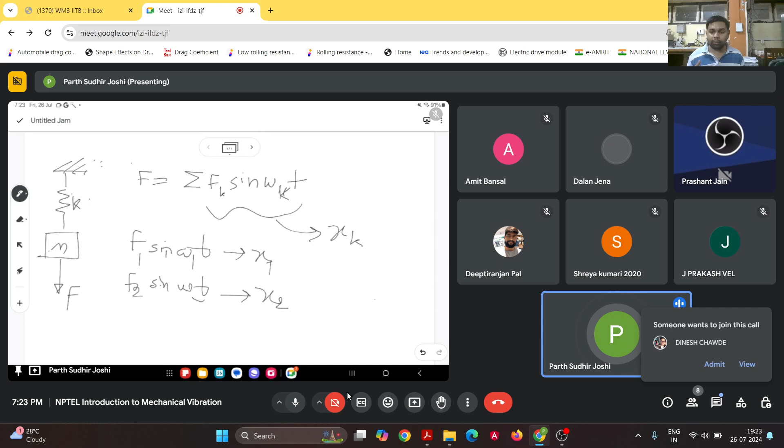Sorry about the bad writing, it's not easy to write on a Jamboard. So basically, I'm trying to express the force as a summation of sinusoidal or harmonic forces. Now we know the response of this system to this kind of harmonic force, let us call it xk. We know how to derive that. So if there is a response to f1 sine omega1 t, and f2 sine omega2 t, we call these x1 and x2. Then the total response would be the sum of these responses, x1, x2, and so on. That would greatly simplify our analysis, because we do not know directly how to derive the response to a certain general periodic force. So by decomposing the forces into harmonic ones, we can simplify our analysis that way. So does that answer your question?

Yes, sir. Okay. Does anyone have any other question? Does anyone else have any other question?

Sir, I have one more doubt in the same concept. There are two types of exciting force: one can be a periodic function type, and the other can be a harmonic type. So what exactly differs between the two? Are sine or cos functions always harmonic functions?

Right, so generally sine or cos are broadly classified as harmonic functions. But a periodic function is a more general kind of function. For example, a square wave or triangular wave are also periodic functions, but it's not easy to write one single closed form equation to represent them. So generally we can write a general periodic function as a sum of different sine or cos functions, and by that we can simplify our analysis. Does that answer your question, sir?

Okay, sir, yeah, okay.

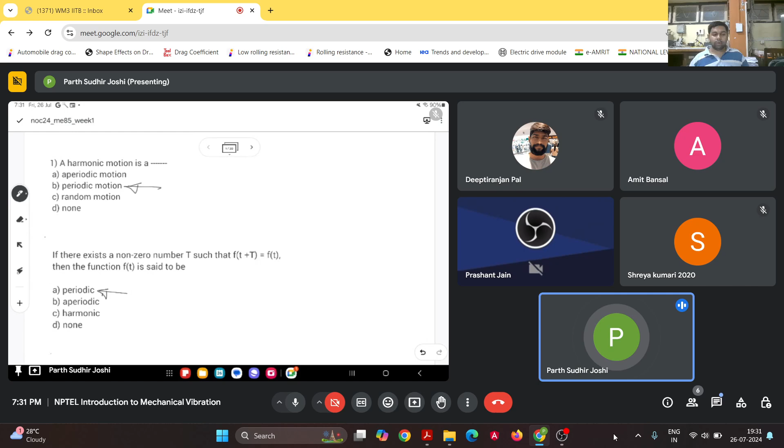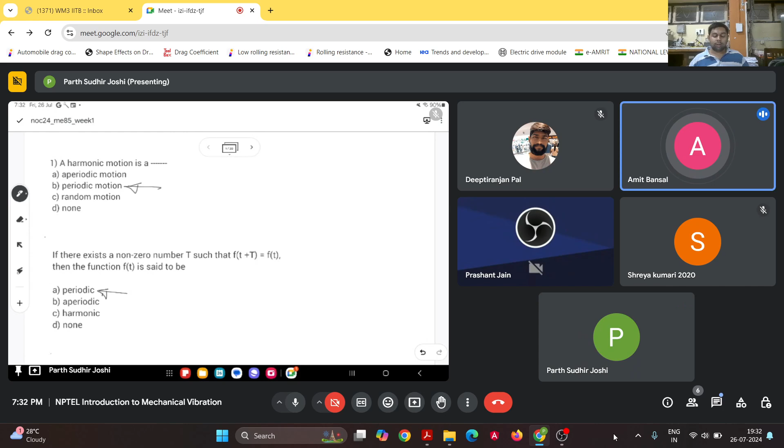So any idea what it is? Sir, periodic. Yes, it is periodic only. That is the general definition of any periodic function, that if there is a number T... so what is that number capital T called? If small t represents time, what is that called? Time period, yeah, time period. So T is basically the time period.

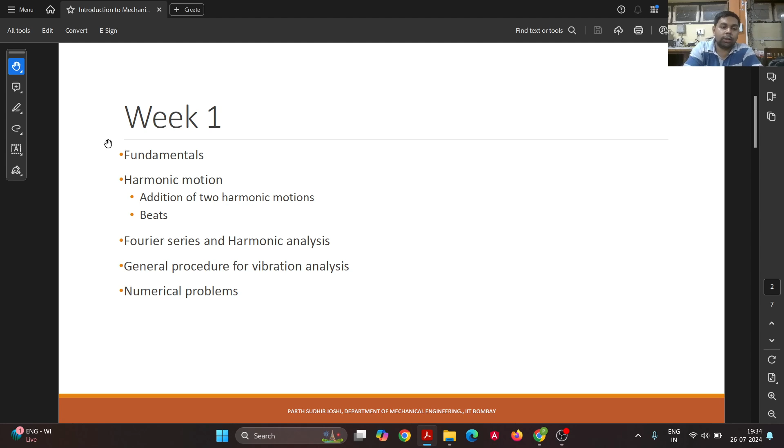I had put together a list of some videos just to motivate you and discuss how the study of vibrations is important. Many of you are already working in industry, so you are well aware why we need to care about vibrations. I put together a list of some videos so you can have a look at that.

Maybe I can just play one or two videos for you. Just let me know whether you are able to hear the audio.

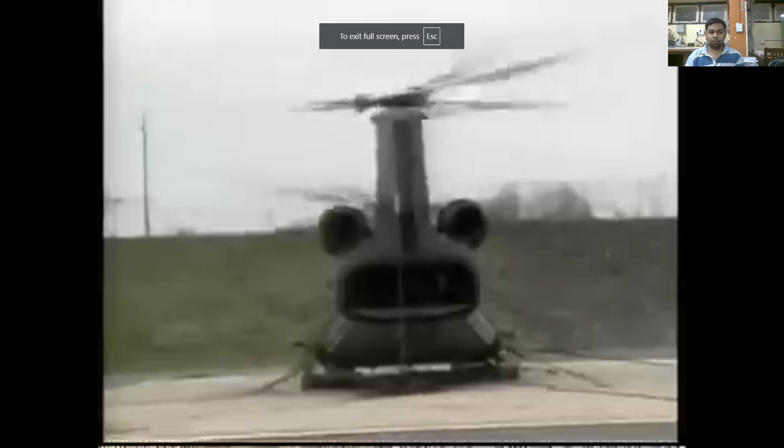So in this video it's about helicopter ground resonance. Are any of you already aware of this thing? No. Are you able to hear the audio? No, audio is not coming through. Fine, anyway, you can't.

Let me just replay it for you. So can anyone describe what exactly happened here?

Sir, I think as you told, due to resonance the helicopter got crashed. Okay, okay, fine, so you are partly correct. Yes.

Anyone else wants to share what exactly is happening here? Yeah, from the video what it is showing is the helicopter is grounded by some ropes and it is being tightened, and due to some rotating unbalanced force, the vibration is starting. The vibrations are coming on the system. Correct, correct, yes, yes, exactly.

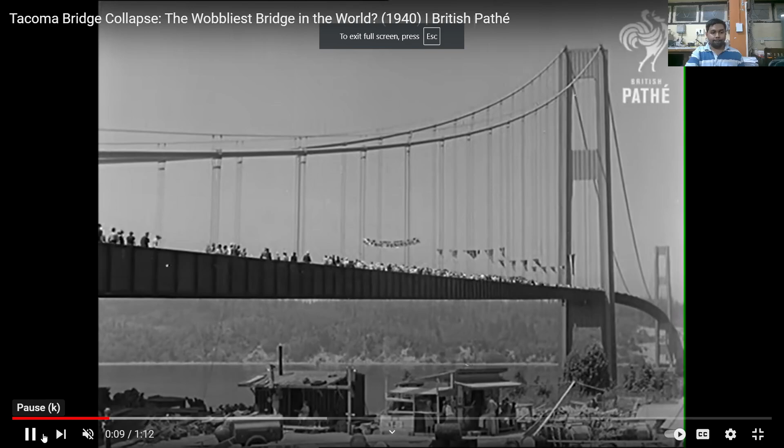So we'll see another example. You might have already watched this earlier, it's very famous - the Tacoma Narrows Bridge.

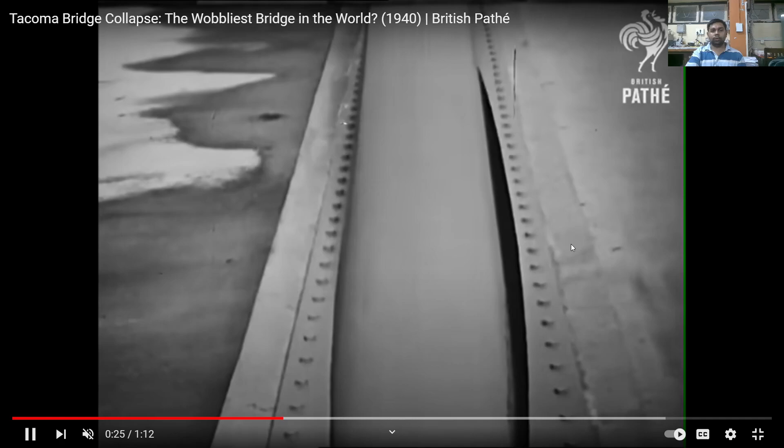You can see how the structure of the bridge is violently oscillating. This happened in 1940, with whatever technology was available at that time. It was a suspension bridge.

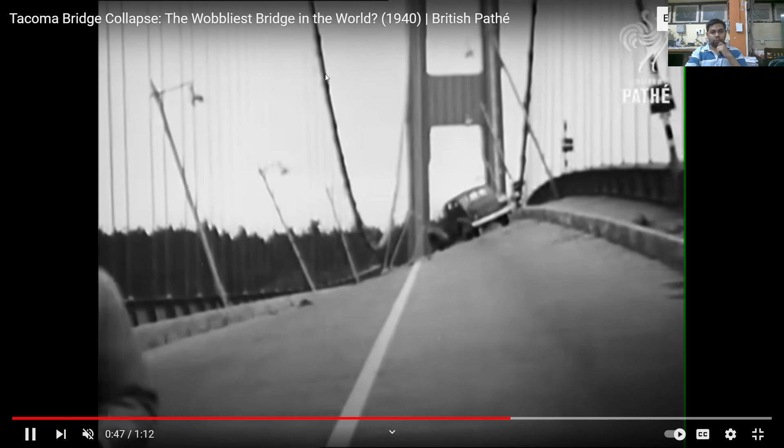Basically, the vibrations are so much that the structure is not able to withstand them, and eventually the bridge just collapsed.

That may happen in some cases, depending on - here the resonance was caused because of the powerful wind that was blowing, and that matched with the natural frequency of the structure, which eventually led to the crash of that bridge.

Another interesting example which I wanted to share, I'll just play that also. So what we see is that there are some cases where vibration is induced because of the external environment. This is another interesting phenomenon which is called - where a fighter plane crashed because of pilot induced oscillations.

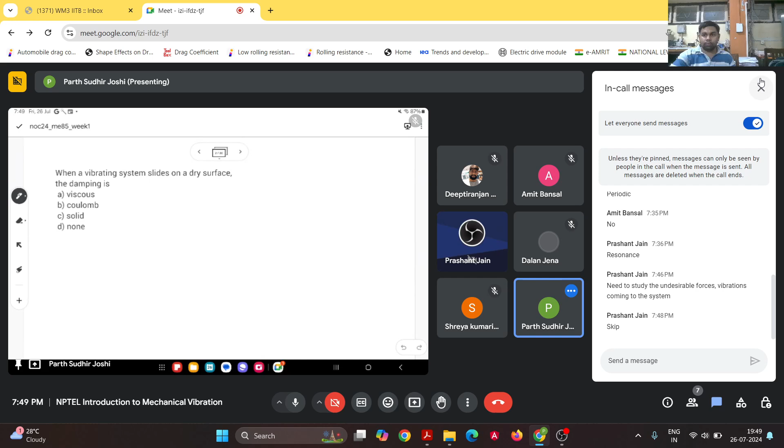When a vibrating system slides on a dry surface, what is the damping called? Any idea what is it called? So basically, it's Coulomb damping.

Damping is basically when we are trying to dissipate some of the energy. Sometimes we are deliberately trying to dissipate energy. Let's say in some cases, like a door hinge. There are some doors where the hinges have a piston cylinder arrangement. The door has its own spring action and will try to close by itself, but there's a piston cylinder to control the motion. That's a classic example of a damper used for desirable purposes. If the damper isn't there, the door might slam if it goes out of control. The damping will dissipate the energy so that the door gradually closes by the time it's almost shut.

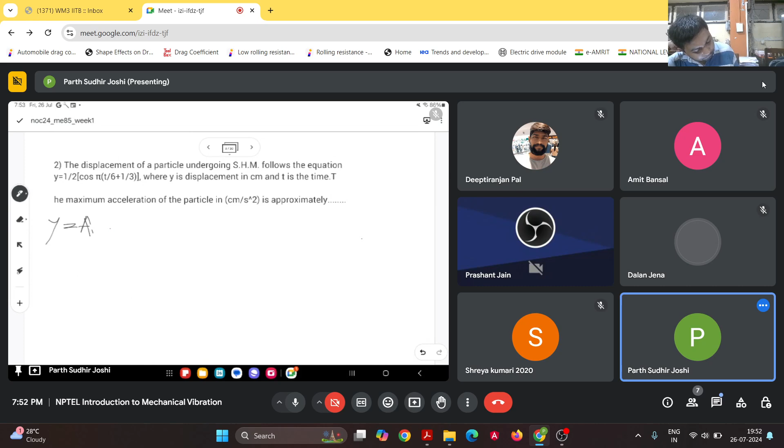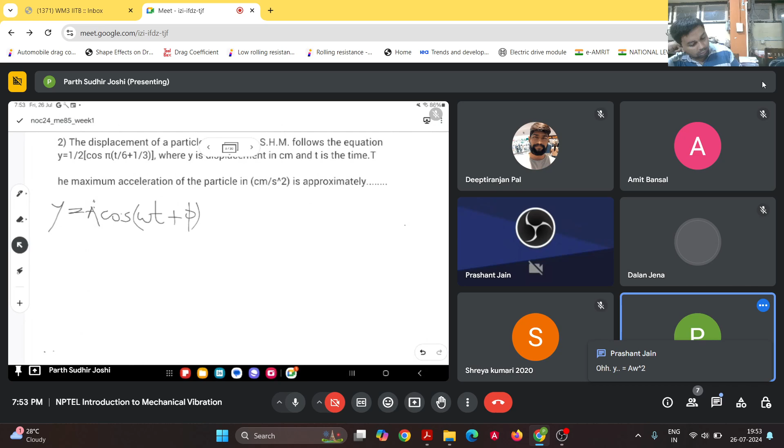Maximum acceleration is 1 by 2. How did you come to that answer? y equals A cos(omega t plus phi), that is okay. So you can compare it to that form: y is A cos(omega t plus phi). So the omega as such is basically... what would be omega?

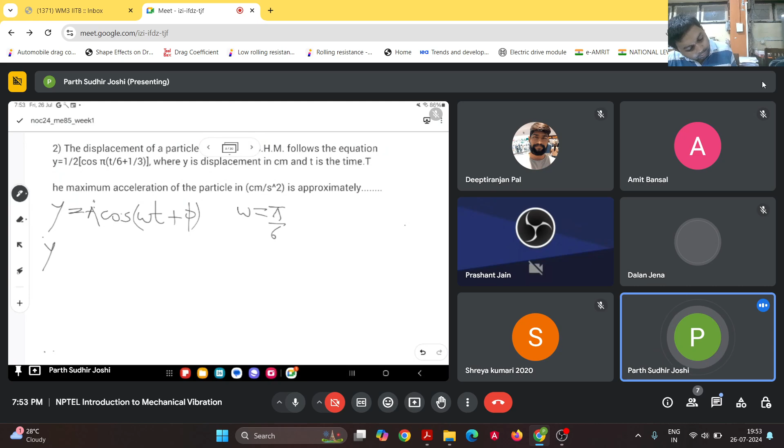So it is pi by 6. And what is the maximum acceleration of the particle? The velocity is basically the derivative, so y dot is minus A omega sin(omega t plus phi), and y double dot will be... (omega t plus phi). So the amplitude of the acceleration is minus A omega squared.

So the magnitude of maximum acceleration would basically be A omega squared. In this case A is half, so A omega squared will be pi square by 36, so basically pi square by 72. That will be the amplitude of the acceleration. Make sense?

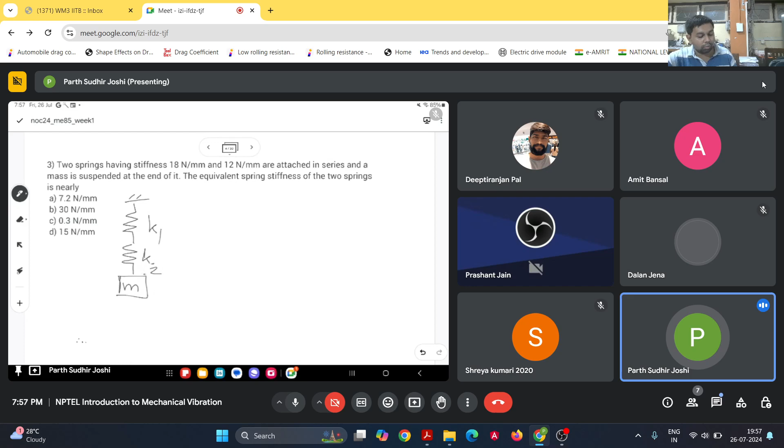When we say two springs are in series, how do we derive the equivalent spring stiffness? To evaluate that, let's say there is some spring stiffness K equivalent, which is basically the force per unit deflection delta.

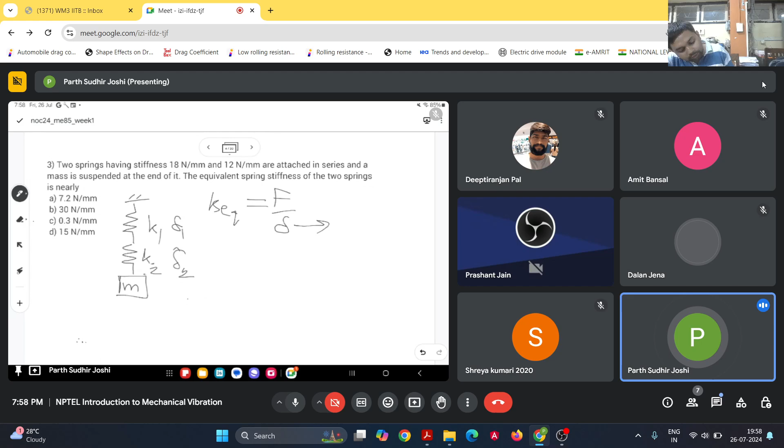Now there are two springs here, and let's say the deflection of spring 1 is delta 1 and spring 2 is delta 2. So what we have is delta is basically delta 1 plus delta 2.

So what is delta 1? Because the springs are in series, the force transmitted through both springs will be the same. So delta 1 is basically force F by K1, and delta 2 is similarly F by K2.

When we put these two equations for delta 1 and delta 2 into the above equation, we get K equivalent is basically 1 upon (1 by K1 plus 1 by K2), which is the expression K1 K2 upon K1 plus K2.

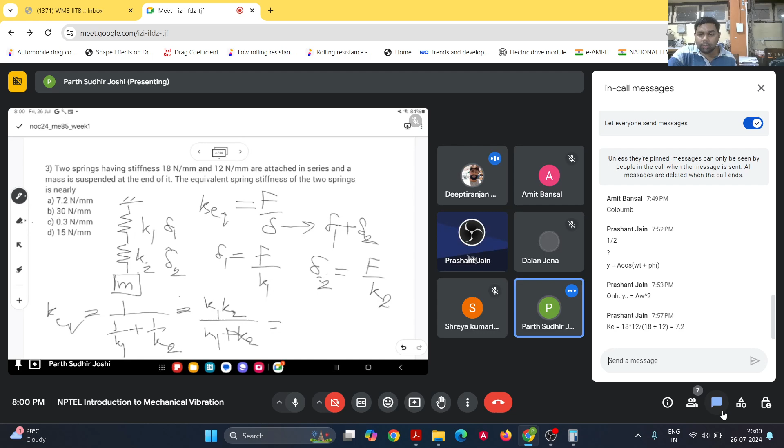So if we calculate this same thing for this example, what numerical value do we get? The answer is 7.2, so option A is correct.

The next question: a harmonic motion is given by x(t) = 20 cos(32t + pi/2), where t is in seconds and the phase angle is in radians. What will be the time period of the motion?

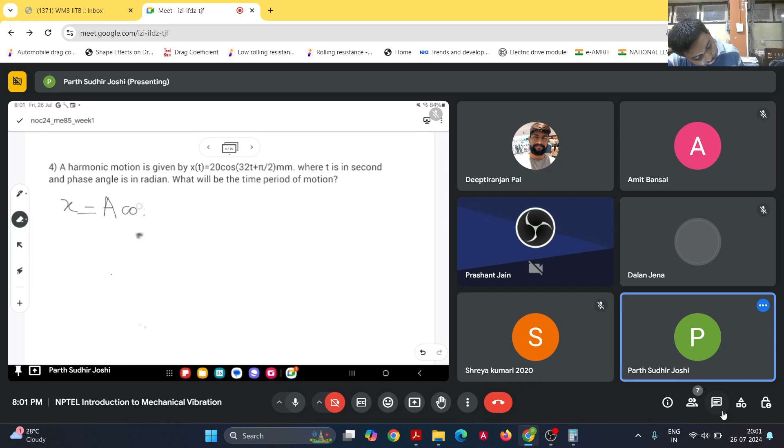Here again we use the same concept: we write it as A cos(...) and compare the coefficients. So a is 20 and omega is 32. The time period T would be 2 pi upon omega, which is 2 pi by 32, which is pi by 16.

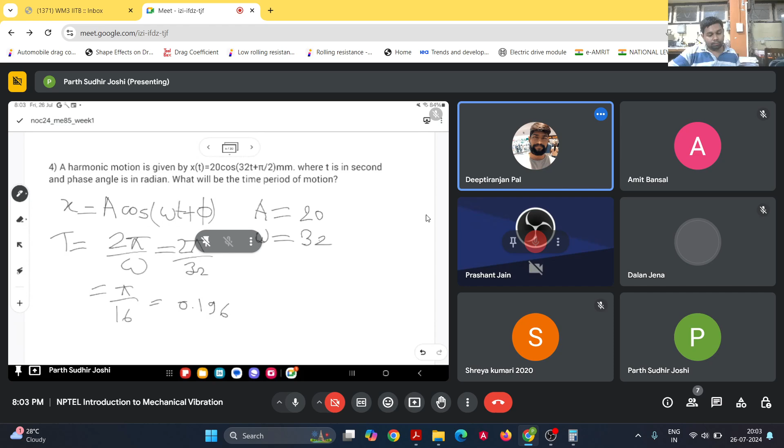So let's come to the next question. The maximum displacement amplitude of the foundation of a centrifugal pump were found to be 0.25 mm and 0.4 g. What is the operating speed of the pump in RPM? How do we solve this problem?

So how do we solve this problem? We will find omega first. How do you find omega? There is a formula: omega square times x. That is right - basically the maximum acceleration is the amplitude into omega square.

So the natural frequency of the oscillations would correspond to the speed of rotation of the pump, and we can find it using that way. But before we go into the problem, why do you think there would be vibrations in a centrifugal pump's foundation? Any idea?

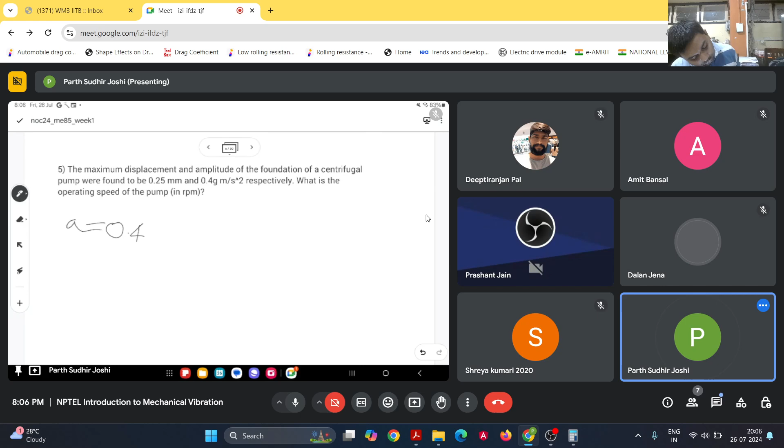So coming to our problem, the maximum acceleration is basically 0.4 g, or 0.4 into 9.8, and our amplitude is 0.25 in millimeters.

So basically this is omega square into x. So omega square would be 9.8 into 0.4 divided by the amplitude, so that would be basically 9.8 into... so omega will be...

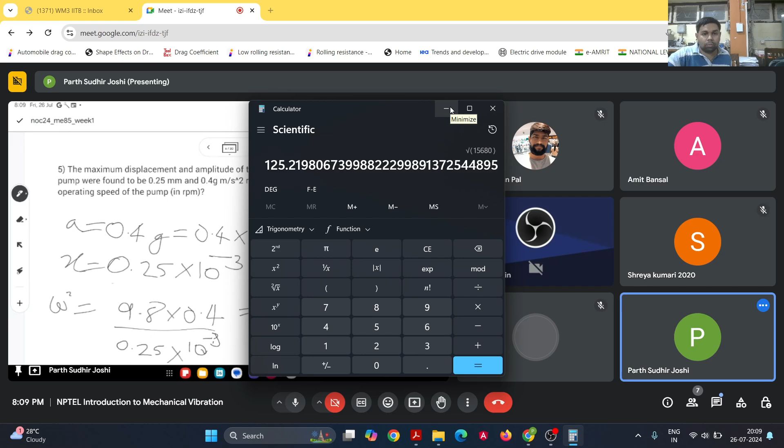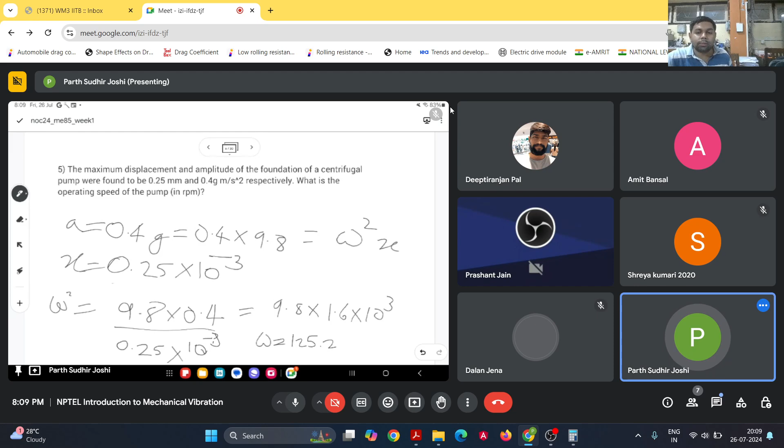So what would be the answer for omega? 125.21. So what is the unit here? Radian per second - yes, this is in radians per second.

So in order to convert it into RPM, we need to multiply it by some conversion factor, which is 60 upon 2 pi, or 30 by pi basically. So it comes out to be around 1195 RPM.

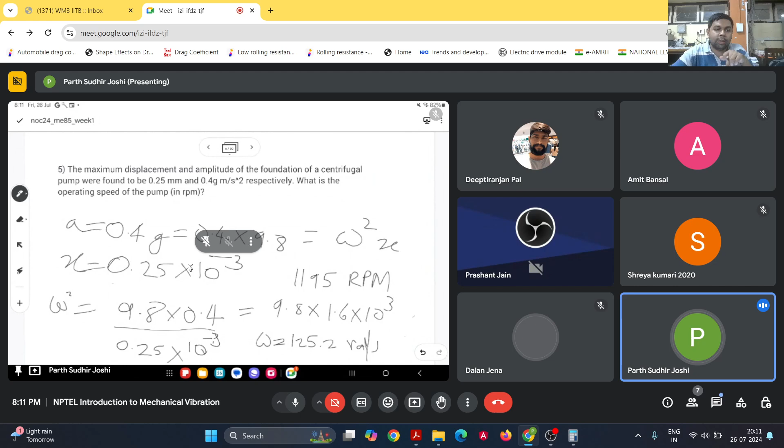So is that the same answer that you get? Okay, so I think then we can just move to the next question.

So it's given that a body describes two motions, x1 and x2. It is asked what is the maximum and minimum amplitude of the combined motion, and what is the frequency of beats. So how do we solve this problem?

So how do you, any idea how do we solve this problem? Combined motion can be represented as a sum of the individual motions, sir. Right. Okay.

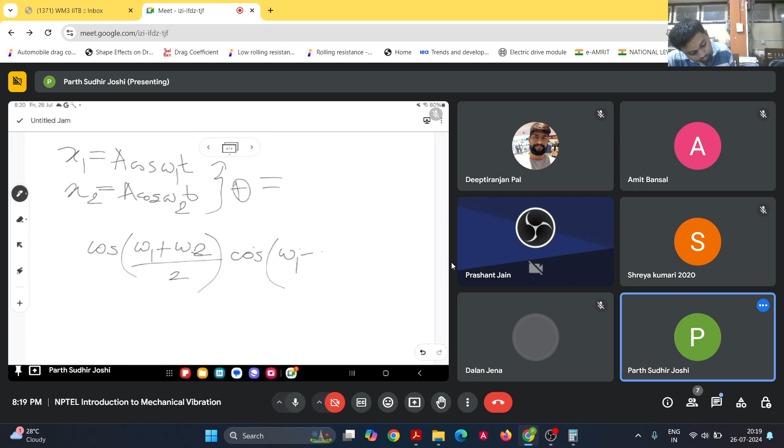So it would be basically cos of omega 1 plus omega 2 by 2, into cos of... so basically this represents two sine waves multiplied to each other, or cosine functions multiplied with each other. One has the frequency omega 1 plus omega 2 by 2, which is higher, and the other is basically the difference, omega 1 minus omega 2 by 2, which is a lower frequency. So it's a combination of two frequencies, one faster, the other slower.

So if x1 is something like this, and x2 is something like this, then the resultant would be something like this. If you construct an envelope, the amplitude will increase for some time, then decrease, then increase again, keep on increasing and decreasing. So this outer envelope is basically the slower sine wave, and the inner one is the faster one. So the frequency of beats is the frequency with which this amplitude goes on decreasing and increasing - that's the outer envelope part, the slower sine wave.

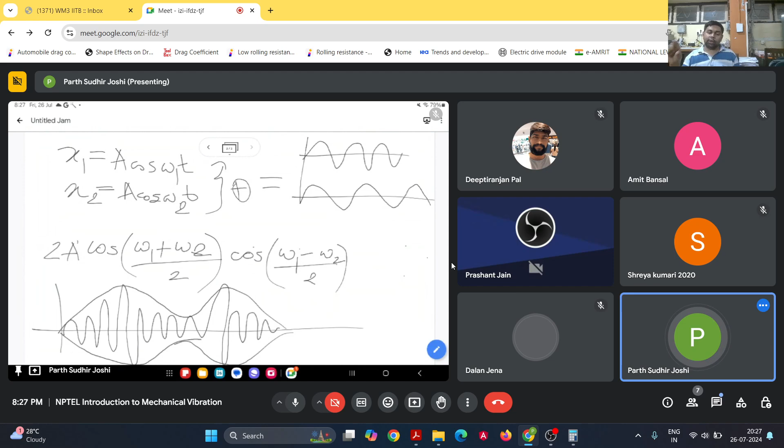So there is some interference, what is called. At certain points of time there is constructive interference, and you might have heard about this phenomenon. Constructive and destructive interference, you might be aware, right? Yes, sir. This can occur in either mechanical vibrations or optics or anything.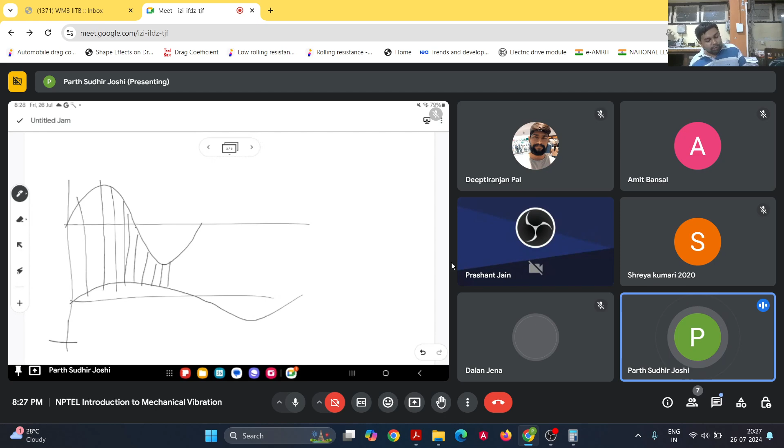So let us say I have two sine waves like here, and let us say I have a slower sine wave like this. Here the starting phase is same, but when we try to combine them together, the amplitudes, when we add up, here the amplitude will be positive, and here the amplitude is negative for this, but positive for this. So the net amplitude will go up, and eventually reach zero somewhere later on, then be negative somewhere, and again go up. At the places where it reaches its highest positive value, those are the places where you will see maximum amplitude.

Whenever two waves interact, there is constructive interference, where you see the maximum amplitude, and destructive interference, where you see zero amplitude as they exactly cancel each other. Again, when the two signals are both negative, you will see the maximum negative value. So it's constructive interference, but in the other direction. The source of the waves may be same or different, but it's basically two different waves interacting in some way or the other.

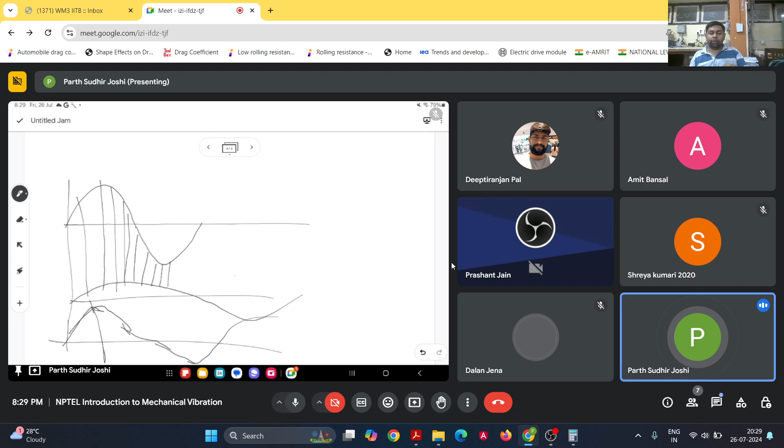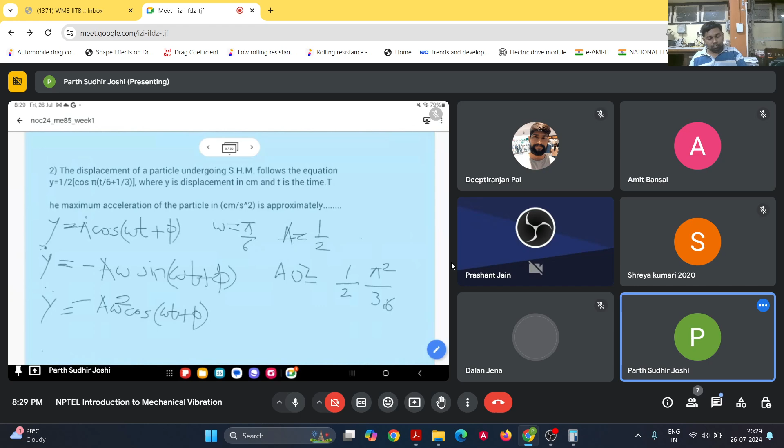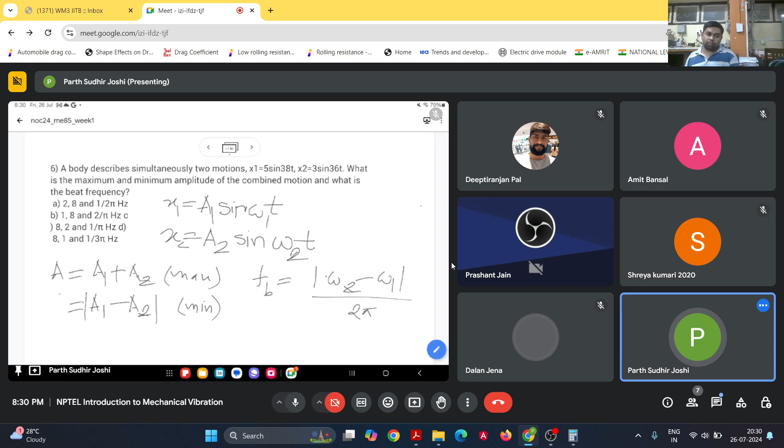Another example we can think about is tuning forks. If you have two different tuning forks which have similar but not exactly equal frequencies, and if you strike both of them and see how the sound intensity varies, you can also hear this phenomenon of beats. So why am I discussing sound? Because the concept is similar, but you can actually physically come across this.

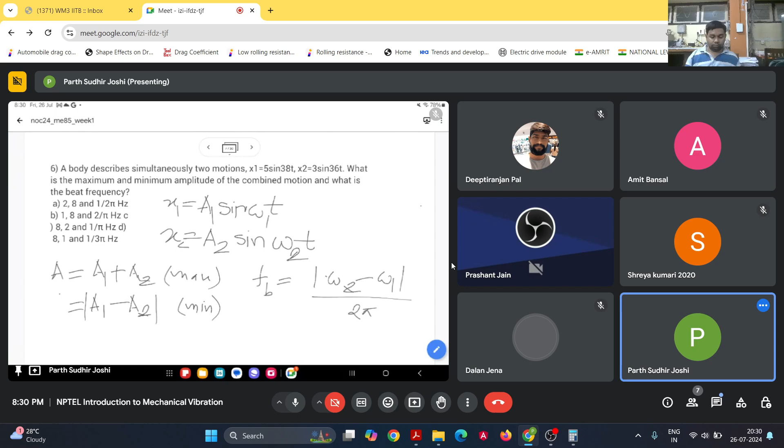So before we come to the next question, does anyone have any questions or comments? If you have any question, please do stop me at any point of time.

It's given that there is a shaft which has an internal and external radius. We need to find out what is the torsional stiffness of the shaft. So what is the fundamental equation for torsion? Let us say there is a torque tau, and the moment of inertia of the shaft is J. G is the modulus of rigidity, L is the length of the shaft, and theta is the angle of twist.

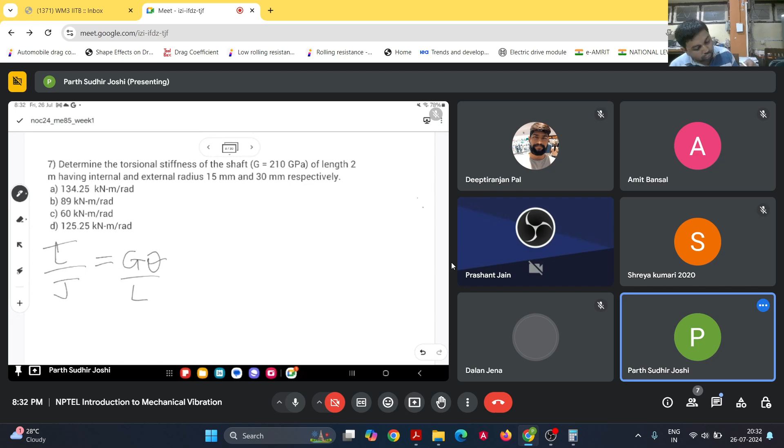So what is the definition of the torsional stiffness K? It is torque per unit twist, which equals G into J by L. Here G is already given, L is also given. What we need to find out is J.

So we have a hollow shaft. Let us say it has external radius R1 and internal radius R2. How do we find out J?

So you just need to substitute the respective values and calculate. Has anyone tried to calculate what would be the value here?

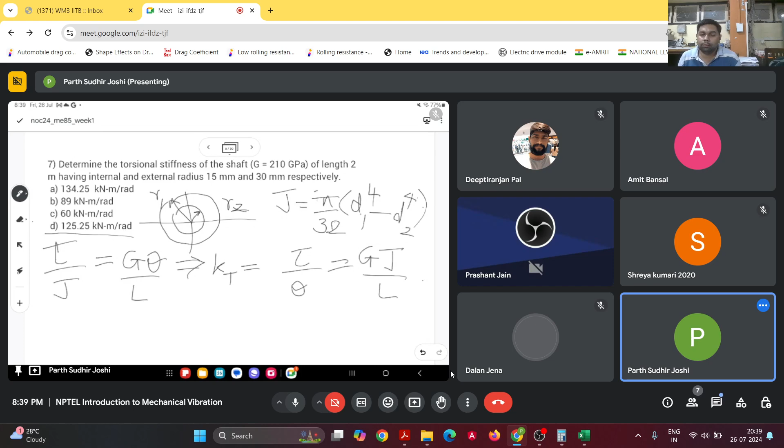If you don't have a calculator or something, you can always use these tools like Excel or MATLAB to quickly calculate things.

So this is an interesting example: the resultant displacement of three harmonic motions. By looking at the vibrations, the motions that we have been given, even before doing anything, what do you think would be the resultant displacement just by looking at the motion? Any idea? Sir, all three have the same frequency. Yes, all three have the same frequency, and amplitude is also same. What is different is the phase difference, right?

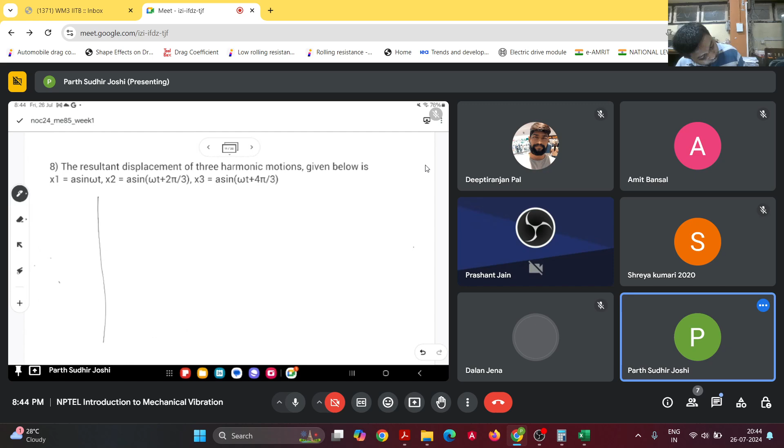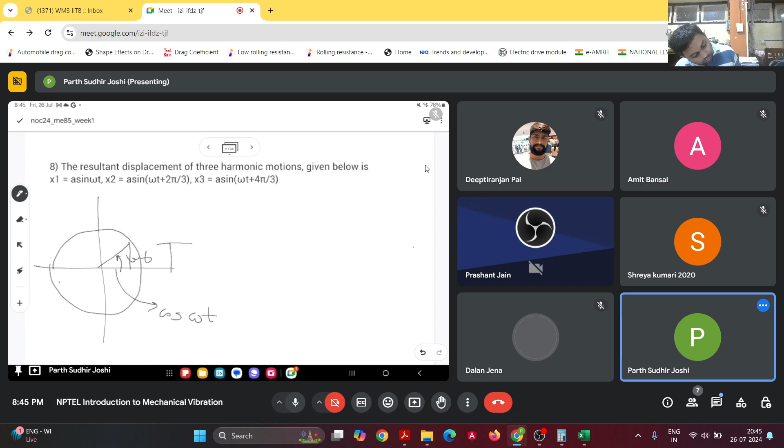So if there is a circle of radius a, let us say this is a circle of radius a. If this angle we call omega t, then the projection on the horizontal axis will be cos omega t. So this will be a cos omega t, and this would be a sin omega t.

So since the radius is a, the horizontal component would be a cos omega t, and the vertical would be a sin omega t. So when the particle moves along the circle with angular velocity omega, the projection on the vertical axis is a sin omega t.

Now if we want to represent a sin of omega t plus phi, how do we do that? Let us say this is particle p1, corresponding to x1. Now if we want to represent particle p2 on the circle, it will be somewhere here, where the angle between these two radii is 2 pi by 3, or 120 degrees.

And similarly, this particle p2, which corresponds to signal x2 — if we project the motion of particle p2 on the vertical axis, it will be the same as a sin of omega t plus 2 pi by 3, because the angle between p1 and p2 is always 2 pi by 3.

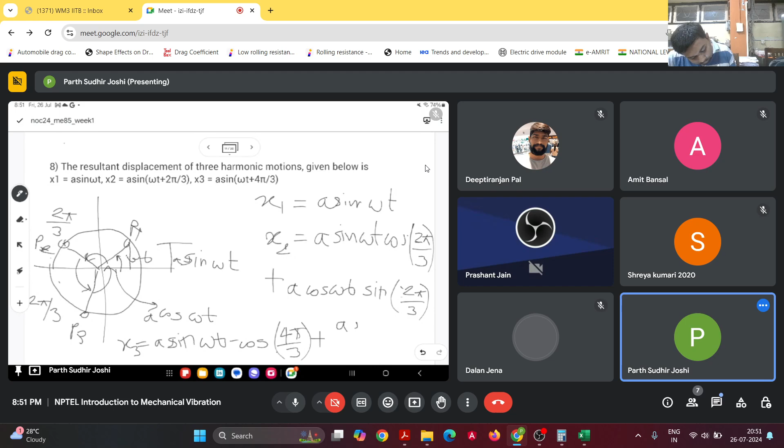So it will be a sin omega t cos 2 pi by 3... similarly x3 we can write as a sin omega t cos 4 pi by 3, plus a cos omega t into sin 4 pi by 3.

Sorry about the bad handwriting. Now what we observe is — so what do we observe when we add these things together?

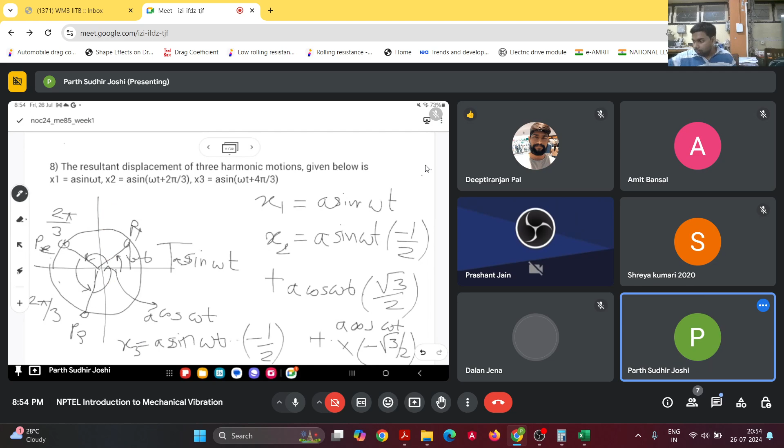I think, hopefully, you understand how trigonometry again confirms that. Does this make sense? Yeah, sure. So we have about 5-6 minutes left, so maybe we can just do one more problem.

A cantilever beam made of an alloy with Young's modulus 72 gigapascal is loaded transversely at its free end. The length of the beam is given, and it has an annular cross section with inner and outer diameters given. What is the stiffness of this beam?

So let us first draw the diagram. There is a transverse load F, let us say, and let us say the cantilever has a length L. Then how do we define stiffness in this case?

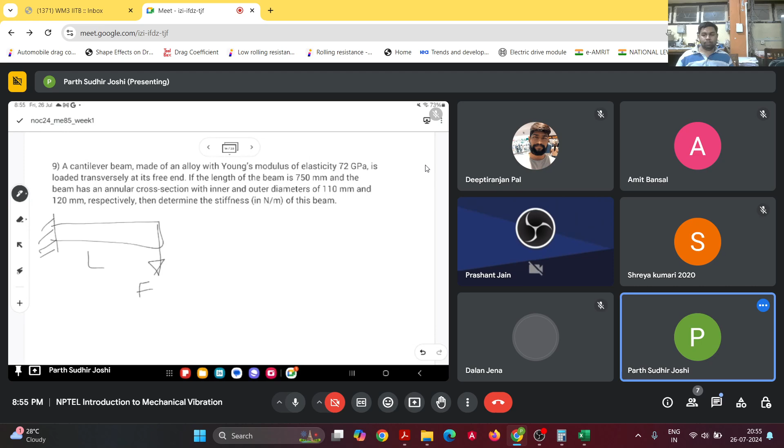Sir, F by delta. Yeah, and what would be delta in this case? Sir, there is a formula for finding the delta for a cantilever beam when it is loaded transversely at the free end. Do you recall that formula? Yeah, it's basically FL cube by 3EI, where I is the moment of inertia of the cross section.

So the stiffness K would be F by delta, which is F upon FL cube by 3EI, which is basically 3EI by L cube. E is given already, which is 72 gigapascal, and L, the length, is given. Our job is to find I.

It's given that it has an annular cross section, so inner and outer diameters are given. Let us say DO is the outer diameter and DI is the inner diameter. So then we can write I is...

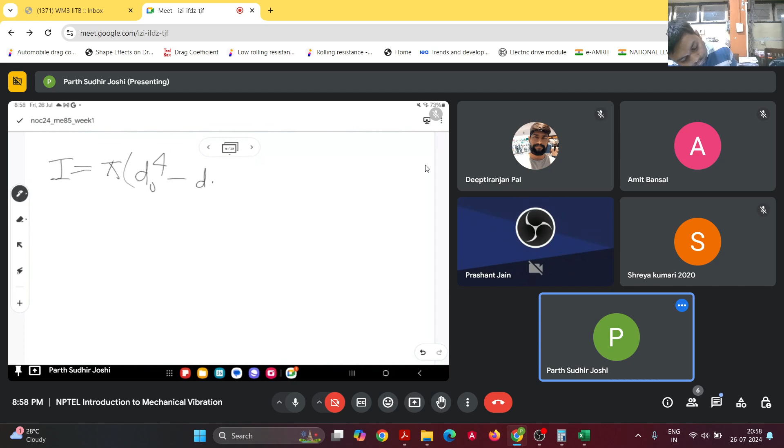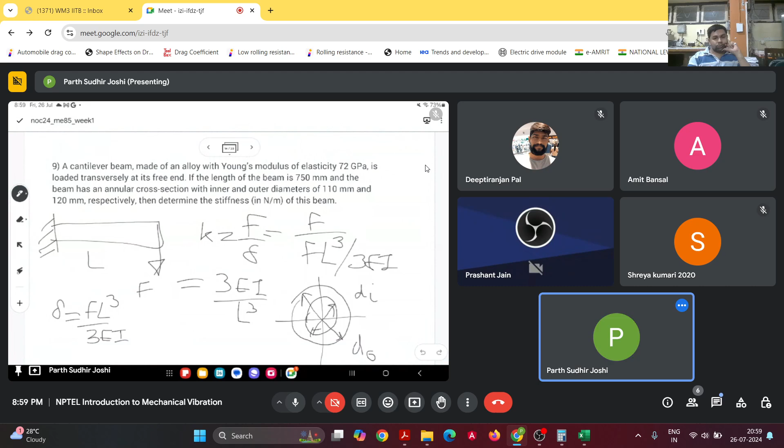That was the expression for this moment of inertia. I think someone tried to calculate. Yeah, so I is 2.99 into 10 to the power minus 6 meter to the power 4. Okay, yeah, so we can just try to calculate that.

So E is basically 72 gigapascal. Outer diameter is 0.12 and the inner is 0.11 meters. The length is 0.75 meters. And yeah, so that's it.